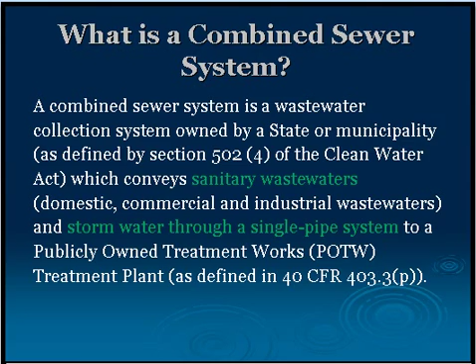There's a nice picture of the combined sewer system in the next slide showing what this means. In layman's terms, when your sewer goes through a common duct or pipe to the treatment works, and you're combining the sewer for stormwater with regular sanitary or industrial discharge, that is a combined sewer system.

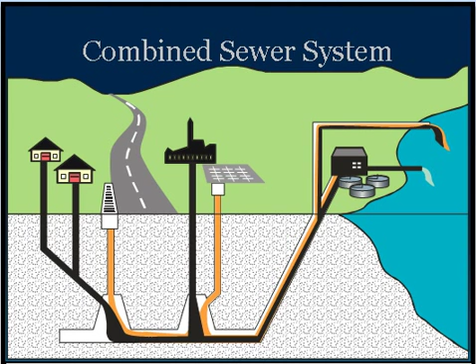Now, what is a CSO? The CSO is any discharge prior to the POTW into the system—that's a combined sewer overflow. That means within the system, you have a discharge that overflows at a point before the POTW.

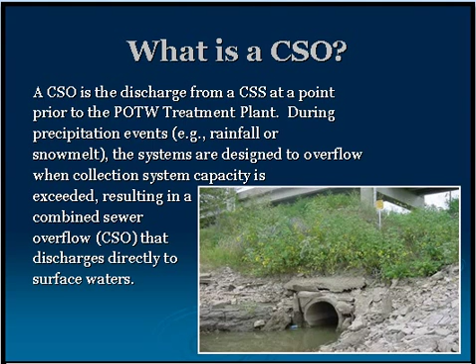The next slide also defines what a CSO is. CSOs are a point source because the discharge is from a pipe. They need an NPDES permit because, under the Clean Water Act, any discharge from a point source into waters of the USA needs an NPDES permit.

Second point about CSOs: they are not subject to secondary treatment requirements applicable to POTWs. As I defined before, since the flow is not going to the publicly owned treatment works, it does not require POTW requirements.

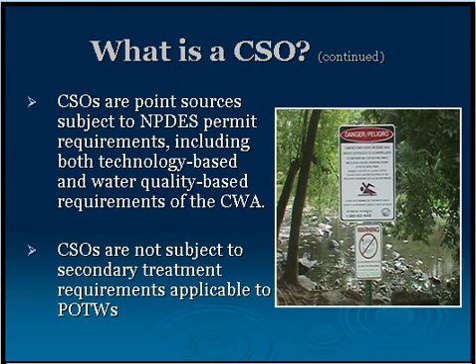Then there's the CSO impact—what is bad about CSOs? Why are we talking about CSOs? Why do we need to control them? That is a big question we have.

It has a negative impact on public health because we use that water, which is receiving the CSO discharge, for recreation or for other natural resources like fish and other things depending on the water. So CSOs have an impact on the environment and water. We need to do something under the Clean Water Act to control that discharge and make sure impacts on human health and the environment can be minimized.

CSO systems were a default design. That means those old cities had sewer systems designed to carry sanitary or domestic sewage, but somehow by default, the stormwater got hooked up with the sanitary sewer system, and it became a combined sewer system.

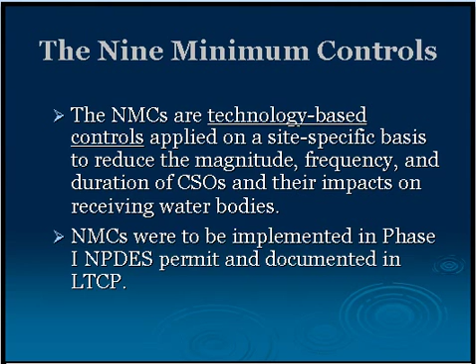So again, the key is that the 9 minimum controls should already have been implemented by virtually all CSO communities at this point. It's important to note that. So going through each of the 9, the first NMC, this control ensures that a combined sewer system and a treatment facility will function in a way to maximize the treatment of combined sewage and still comply with the NPDES permit requirements. Programs should include operational plans, regular inspections of facilities, training of personnel, and documentation and tracking of the program.

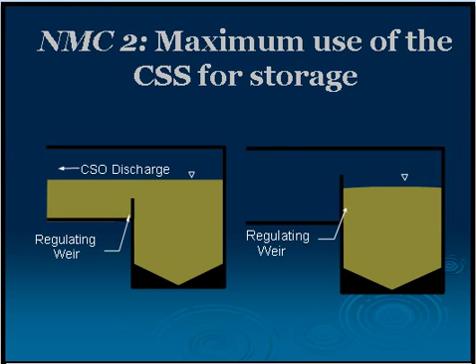The third 9 minimum control, reviewing and updating your pretreatment program, can help to minimize discharges into the CSS from non-domestic sources, thereby reducing potential impacts of these pollutant sources in CSOs. And even for small communities that may not be part of the national pretreatment program, working with your industrial users in a similar fashion can be effective in reducing toxics.

The fourth of the 9 minimum controls is maximizing flow to the POTW treatment plant, and that will take advantage of existing infrastructure that might be underutilized, either by ensuring more flow gets to the treatment plant to take advantage of excess treatment capacity, or by increasing the plant's capacity to handle the entire flow from the combined sewer system.

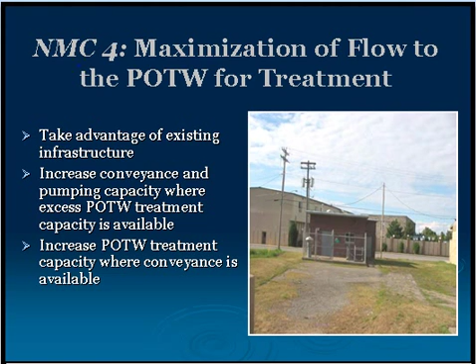This can involve evaluating the combined sewer system for bottlenecks at pump stations, within pipes, etc., and making sure that all flow that can be treated in the plant makes it there, or perhaps adjusting the capacity of individual unit processes within the treatment train itself. Next.

The fifth of the 9 minimum controls is elimination of CSOs during dry weather, and the NPDES program prohibits dry weather overflows, the acronym DWO. And this 9 minimum control includes inspection of the system to identify DWOs, correction of the dry weather overflow, notification of the NPDES permitting authority when a dry weather overflow has occurred, and the submission of a report about the corrective actions taken. Next.

The sixth minimum control is intended to reduce or eliminate floatables from the combined sewage through simple measures such as baffles, screens, catch basin modifications, nets, skimmers, and booms.

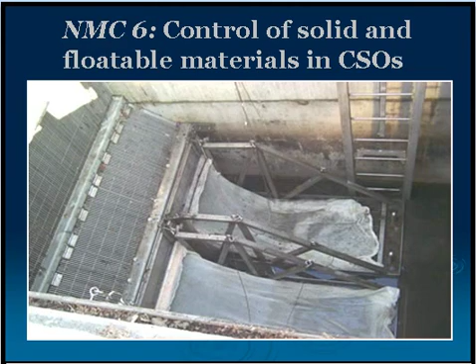9 minimum control number 7 is pollution prevention, which is intended as a source control effort to reduce pollutants from entering the combined sewer system in the first place. Many of these are similar to what's done for stormwater, which makes sense. That's where a lot of the floatable materials are coming in through that vector. So these can include physical efforts like street sweeping, hazardous waste collection, recycling efforts, and also public education efforts to get the public thinking more about their potential contribution to CSO impacts.

Public notification is an important step to take because the public will then be aware of the location of CSO outfalls, the occurrence of CSOs, their potential effects, and any recreational activities that might be impacted by the occurrence of a CSO. This can be done by posting permanent signs at outfalls, or posting notices when CSOs occur, or sending letters to residents summarizing CSOs and their impacts. In addition, websites have often been used in the last 10 years or so to accomplish a similar approach.

One thing to note here is that public notification, which is one of the 9 minimum controls, is not to be confused with public participation, which is a required element of a long-term control plan. Although public notification regarding CSOs may get the public to participate more in CSO control planning when you do get to the long-term control plan stage.

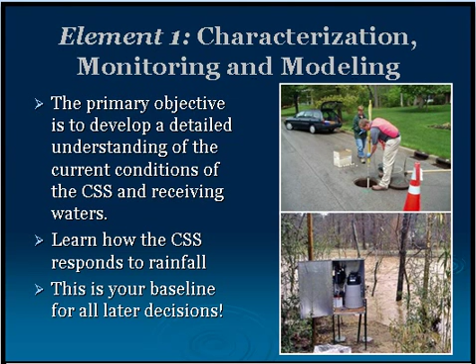Well, it just underscores, if you took the message for small communities, the required steps for developing an LTCP per the policy are the public participation, the consideration of sensitive areas, the evaluation of alternatives, and then the post-construction compliance monitoring program. Well, if evaluation of alternatives is required, but you haven't characterized your system, you could have a challenge. But ultimately, that's correct. I'm going to be going through all of the elements, but only those 4 that we highlighted earlier are required. Thanks, Jim. You're welcome. Okay, next.

The second element, and this one is one of the ones that's required, is public participation. Let's start with what the CSO Control Policy says about it, which is that when developing a long-term control plan, the permittee will employ a public participation program that actively involves the affected public in the decision-making and also to select CSO controls. Please note the emphasis on active involvement of the public. The key is to make a genuine effort to engage the public. Note that the permittee's ability to implement the plan may be questioned if the public has not been involved.

And the public that we're talking about here would be the residents, ratepayers, industrial users, recreational interests, or other interest groups that are affected by CSOs in a community.

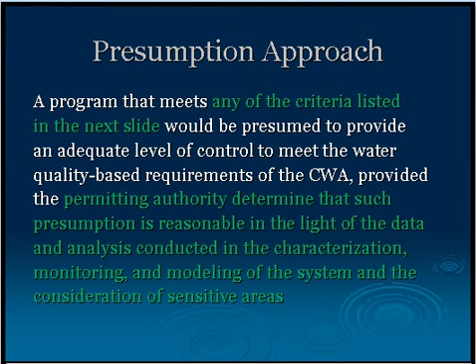First of all, that the permitting authority thinks that this is a reasonable assumption based on the data that the permittee has collected to characterize their system. And second of all, that this is a reasonable assumption considering any impacts that the permittee has in sensitive areas. So if you discuss using the presumption approach with your permitting authority and the permitting authority thinks that you have a reasonable chance of achieving water quality standards, meeting these 2 criteria, then the presumption approach may be appropriate for you.

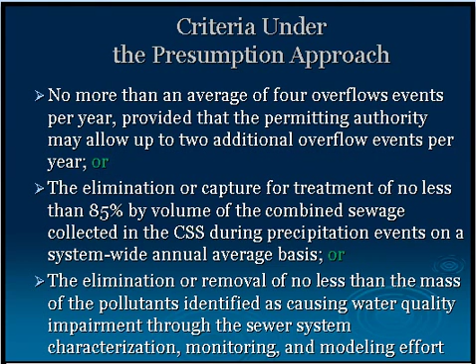There are 3 separate criteria under the presumption approach. The first criterion is achieving no more than an average of 4 overflow events per year, provided that the permitting authority may allow up to 2 additional overflow events per year. So this is commonly referred to as no more than 4 overflow events. The second criterion would be the elimination or capture for treatment of no less than 85% by volume of the combined sewage that's in the CSS during precipitation events, and that's on an annual average basis.

The third criterion is the elimination or removal of no less than the mass of pollutants identified as causing water quality impairment through the sewer system. And this is typically considered to be, again, 85% capture of mass.

Tim, I'll just make a little correction. No less than 85%. No, I'm sorry. Yes, no less than 85%. Right. Thanks. Yep, of course.

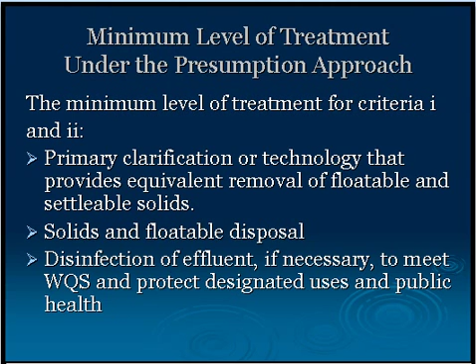There is a minimum level of treatment prescribed under the presumption approach, and if you have discharges that meet this minimum level of treatment, then they are not going to be considered CSOs under the presumption approach. And so the minimum level of treatment required is primary clarification or a technology that provides equivalent removal of floatables and settleable solids, disposal of those solids and floatables, and then, if necessary, disinfection of the effluent so that you meet water quality standards and protect designated uses.

The demonstration approach is slightly different. In order to meet the demonstration approach, the permittee has to demonstrate each of the following. First of all, that the planned control program is adequate to meet water quality standards. Second, that any remaining CSOs will not preclude attainment of water quality standards, and we'll get back to this in a second. Number 3, the planned control program will provide the maximum pollution reduction benefits reasonably attainable. And number 4, that the program can be expanded if it's not adequate to meet water quality standards.

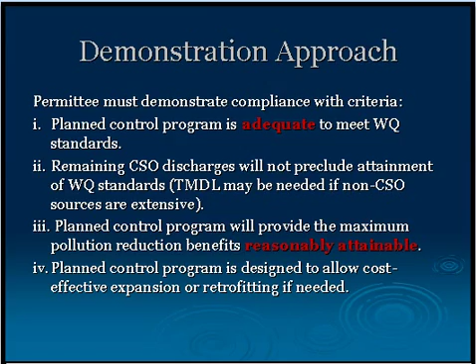And basically, the demonstration approach recognizes that there may be other sources of pollution in the receiving water other than CSOs. And therefore, it has this reference to the fact that CSO discharges should not preclude attainment of water quality standards, instead of just accepting that the CSOs have to be reduced down to the point where the watershed does meet water quality standards, because if there's upstream sources of pollutants, then obviously that's not going to occur no matter what you do to the CSOs.

And as it's noted in the second bullet there, in some cases you may need a TMDL in order to control the other sources of pollution into the receiving water in order to get that receiving water to meet water quality standards. And as I just said, the demonstration approach is particularly appropriate where attainment of water quality standards can't be achieved through CSO control alone.

And in these cases, the appropriate level of CSO control has to be defined based on the water quality data that you collect for the CSO community and for the receiving water, any modeling that you might do, and other economic factors. So in this case, you want to evaluate the receiving water to see what impacts there are, and probably through modeling try to determine different levels of CSO control and what they might achieve in terms of impacts on the receiving water. This is typically going to require wet weather surveys to evaluate the impacts of CSO control in the receiving water.

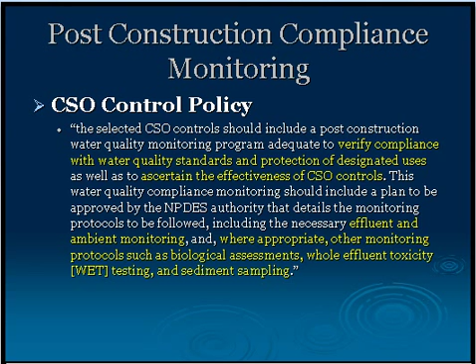And here's a description of the post-construction compliance monitoring step from the CSO Control Policy. I'm not going to read through the whole thing, but I want to highlight what's there in yellow. The post-construction compliance monitoring statement from the CSO Control Policy has two components. First, verify compliance with water quality standards and designated uses. And second, ascertain the effectiveness of CSO controls.

And how are you going to do this? Well, the next part in yellow explains how you might need to do that. It might include the permittee conducting effluent and ambient monitoring and, where appropriate, other monitoring protocols such as biological assessments, whole effluent toxicity testing, or sediment sampling.

Let's look at the two parts of post-construction compliance monitoring. The first step is verifying compliance with water quality standards and designated uses. And most typically this is going to require the permittee to conduct ambient monitoring in the receiving water to determine whether they are indeed meeting water quality standards. The next thing you need to do is ascertain the effectiveness of CSO controls. And this part's a little trickier. What exactly does that mean? Well, the first thing you need to know is what approach did you propose in your long-term control plan?

For example, if you propose that you are going to try to achieve criterion 1 of the presumption approach, no more than 4 overflows per year on an annual average basis, then that would be what you're trying to determine here. You're going to try to see whether you have indeed achieved no more than 4 overflows on an annual average basis. If you've chosen criterion 2, you want to make sure that you have achieved no less than 85% capture by volume of the sewage in the CSS during precipitation events. So you need to first state what you propose to do, and then evaluate that to see whether you've actually achieved that.

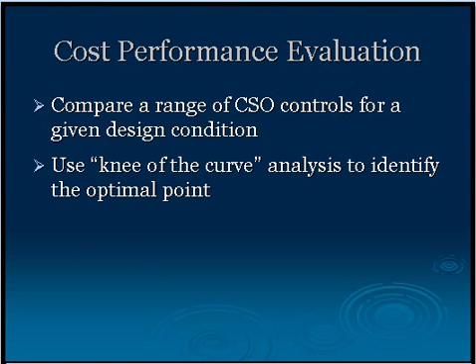So cost and performance analysis involves looking at the performance of the proposed controls over a series of conditions—for example, 3-month, 6-month, and 1-year storms—and evaluating the performance of those controls for a given design condition. Many communities then do what's referred to as a knee of the curve analysis to identify where they get the most bang for the buck with their controls.

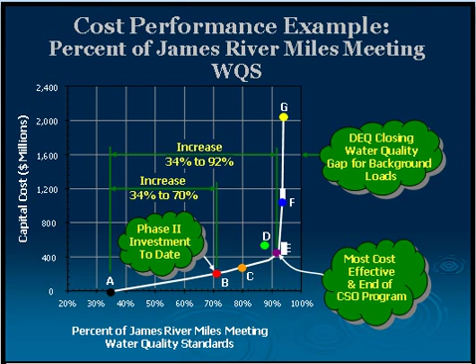Here's a slightly different depiction of the cost versus performance scenario. Here's an example where, rather than using the number of CSOs, this shows the number of river miles that are meeting water quality standards. But again, you still have that knee of curve, at 90% in this case, and $400 million.

Okay, so for implementation schedules—this is element 8—and this is what the CSO Control Policy says about the schedules. It's supposed to factor in the financial capability as well as the relative importance of the adverse effects. So that could be the sensitive areas, what the designated uses are. A host of factors should be considered here.

A little bit more detail on determining financial capability. It's basically a 2-step process. The first phase evaluates the financial impact of the long-term control plan implementation on a community's residents through things like median household income and unemployment rate. The second phase takes a look at the financial capability of the permittee through things like bond ratings and community debt. This is where you project out over a future number of years where you'll be versus what your bills will be, what your cost to implement your control plan will be.

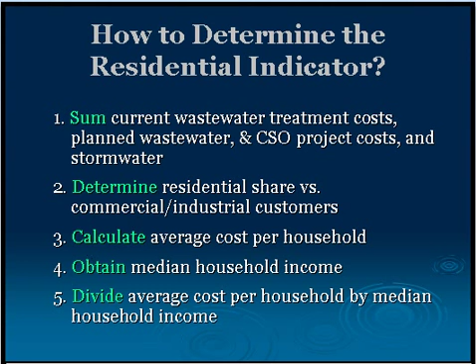So more details about determining the residential indicator. First, you need to add up all of the costs for current and planned wastewater, CSO, and stormwater operations, and then determine the share of these costs that are paid by residential users as opposed to commercial or industrial clients. Then you calculate the average cost per household.

Next, you obtain the median household income for your area, and that can generally be obtained from someone in the community in the tax office or other financial group. Then divide that average cost per household by the median household income. I'd like to point out that most of this data should be readily available, and there's some additional information on this in our resources document on the webcast, and I think we actually have a slide later on that has a couple of the guidances EPA's put out on this.

Okay, so most of the data for the financial indicator is also readily available, although it might be a good idea to get the financial folks from your municipality involved, because they should know where to find it fairly easily.

Evaluate the permittee as strong, mid, or weak on a number of factors such as bond rating, debt, unemployment rate, and then calculate an average score.

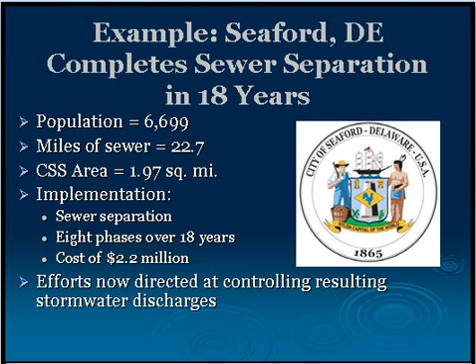We have a slide here from the city of Seaford, Delaware, an example of a city completing their sewer separation program in a phased approach over 18 years. This is a small CSO community, population a little less than 7,000 people, with a combined sewer system area of a little less than 2 square miles. This community implemented a sewer separation project over 18 years at a cost of $2.2 million.

So you see that based on their financial capability analysis, they were able to phase in their program over a relatively long time period. However, now Seaford's efforts are directed at controlling stormwater discharge now that they've separated their sewers.

What I want to do now is talk a little bit about some of the common issues for small communities. This is a small community webcast, and we've touched on some of these issues before, but now we're going to go into them in more detail. I want to talk about the characterization step - characterizing the combined sewer system and the receiving water, choosing your CSO control approach, and lastly, sewer separation.

So first, characterizing your system. We've talked a lot about this. It is one of the 9 elements of a long-term control plan, but it is not one of the elements that small communities are typically required to do, although the permitting authority has the discretion to require this of small communities. But in my opinion, this is a really critical item to include in your long-term control plan. You need to know your combined sewer system.

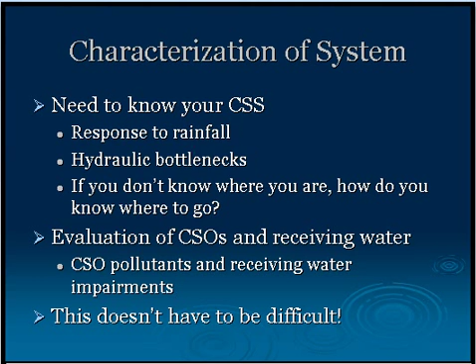And the last point on this is that this doesn't have to be difficult. It doesn't have to be an elaborate effort to characterize your system. In a lot of cases, people have good information on their combined sewer system, whether they have maps or they've done some sort of preliminary analyses.

And my advice would be just to include this information in your long-term control plan, because it can be really helpful when your permitting authority is reading it to demonstrate that you really understand your system, you know where you're coming from, and you know where you need to go. So I'm not sure whether anybody had anything additional to add to this. I think we've covered this several times.

The next thing that I want to talk about is choosing a CSO control approach. And over the course of reading a lot of long-term control plans, both from large communities and small communities, I was very surprised at the number of times that it wasn't clear in the long-term control plan what approach the community was using. But obviously, you need to define a goal that you can evaluate.

So in other words, if you're going to try to achieve no more than 4 overflows per year, criterion 1 of the presumption approach, and that's how you're going to lay out your plan, then you should make sure that you state that in your plan so that your permitting authority and anybody that reads your long-term control plan knows that that's what you're going to be trying to do.

As we've said, the CSO Control Policy provides 2 potential approaches, the presumption approach and the demonstration approach. But again, we also want to emphasize that these approaches are not guarantees. These are steps that you can take to try to achieve water quality standards, but they are not in themselves the end-all of CSO control.

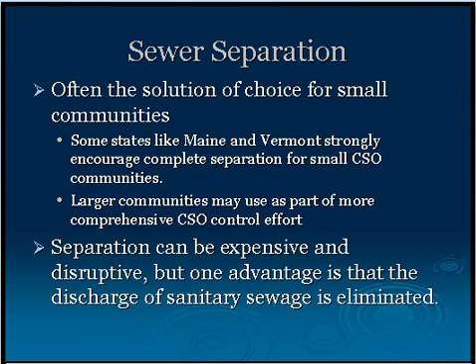There are advantages and disadvantages to sewer separation. First of all, separation can be expensive. It can also be disruptive, both to businesses in the area where sewers are being separated, and also to traffic. But one major advantage of sewer separation is that the discharge of sanitary sewage through CSOs is eliminated. So problem solved, right? Well, maybe not exactly. There are a number of implementation issues that are associated with sewer separation.

First of all, when you separate sewers, this typically results in more urban stormwater being discharged into receiving waters, and this is probably untreated urban stormwater. Second, complete sewer separation is often hard to achieve, particularly if you don't have good knowledge of your combined sewer system. A few minutes ago, we talked about the characterization step and how this may not be required of small CSO communities. But unless you have a real good knowledge of how your combined system is set up, it might be hard to ensure that you've actually achieved complete separation.

The last thing I want to note here is that post-construction compliance monitoring is still a requirement even when you separate your sewers. This may be something as simple as doing monitoring in your receiving water to make sure that the impact of CSOs has been eliminated. And Mohammed, did you want to say a little bit about EPA's point of view on post-construction compliance monitoring for communities that separate their sewers? Yes.

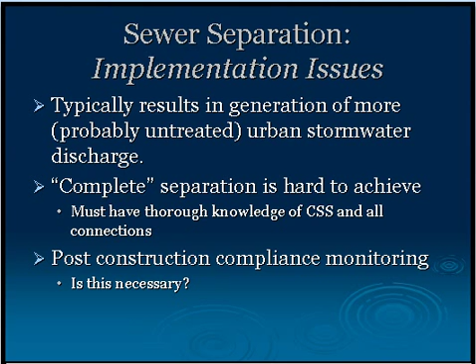But at the same time, there is some backlash to this monitoring too. I was a combined sewer, I separated the sewer, I'm no more a CSO community, why do I need to do the requirements of the CSO? I have no answer for that one, because sometimes I say the solution is like: I have a headache, chop off my head, but chopping off my head, I may die. So we need to be careful to draw that line; especially this is the responsibility of the NPDES authority to draw the line on what needs to be done in case of sewer separation.

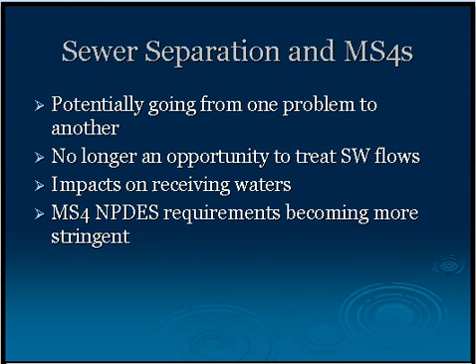Right, and actually I want to talk about that a little bit more, sewer separation and its relationship to stormwater. Potentially, when you separate your sewers, you're going from one problem to another, because once you separate your CSOs, you've got untreated stormwater going directly to the receiving water, and this can increase impacts on receiving waters. And one thing that we want to point out is that municipal separate storm sewer system, or MS4 NPDES permits, are becoming more stringent. And so you may end up having solved one problem, your CSO problem, but eventually having an even more difficult to resolve stormwater problem. So just something to think about if you're considering sewer separation.

And I want to move on and discuss some impending issues for the CSO communities, and I'll go through this quickly. As of July 2008, which is the last comprehensive data that we have, we're doing another compilation now, there were 559 communities that were implementing CSO controls. That included 451 permittees that had long-term control plans with enforceable schedules, 40 permittees that had other CSO control measures with enforceable schedules, and then 68 permittees that had separated their sewers. So there are a lot of communities that are in the implementation stage.

That means that there are a lot of communities that are starting to look into the different types of CSO control technologies that they might implement. And also there are some permittees that are actually past that and into their post-construction compliance monitoring phase. So just be aware that there may be other resources out there. There are probably other communities that are starting to face the same implementation issues that you are, and forums like this are a good opportunity to share that type of information.

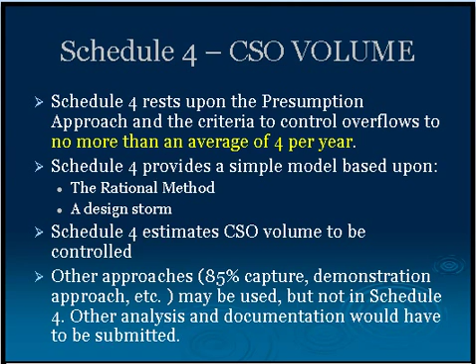And as we stated before, you can use other approaches, if you want to use the 85% capture approach or criterion 2 of the presumption approach or the demonstration approach or any other type of approach. You can use those, and you can still use LTCP-EZ, but you can't use that in Schedule 4. You're going to have to do that analysis as a separate item and attach that.

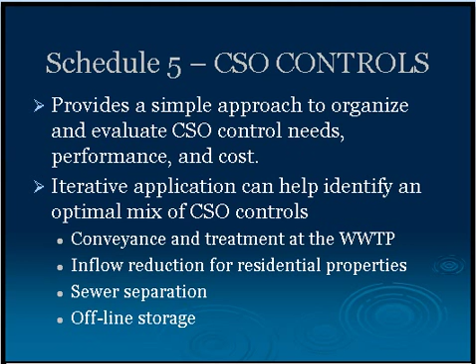Schedule 5 is, once you've determined how much volume you need to control through Schedule 4, an iterative approach to looking at some individual types of controls and doing some scenarios to determine how much control you could implement with each one of these different types of CSO controls until you get down to meeting the volume requirements that you've calculated in Schedule 4. Schedule 5 includes conveyance and treatment at the wastewater treatment plant, inflow reduction for residential properties, sewer separation, and offline storage.

Schedule 6 is the CSO affordability analysis, and this is the same financial capability analysis that Jim went over earlier, except it's in an LTCP-EZ format. And as Jim noted, this is primarily useful as a tool for negotiating your schedule, but it does not eliminate requirements to control CSOs.

And finally, I want to talk a little bit about green LTCP. This basically adds green practices to the LTCP-EZ template. There's been a lot of interest recently in doing green infrastructure, and EPA recognized that and decided to develop the LTCP-EZ green template. Basically what this does is it uses green practice to compute a reduction in runoff that reduces the CSO volume that you've calculated in Schedule 4. And then in Schedule 5, you can evaluate some specific types of green practices to achieve that runoff reduction.